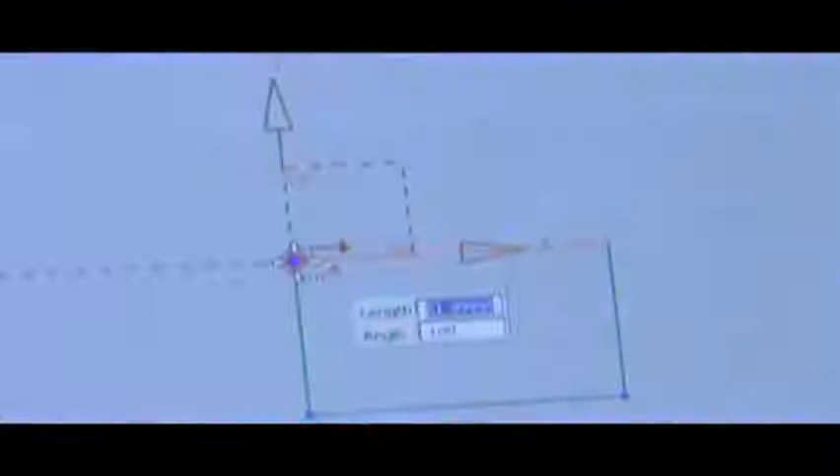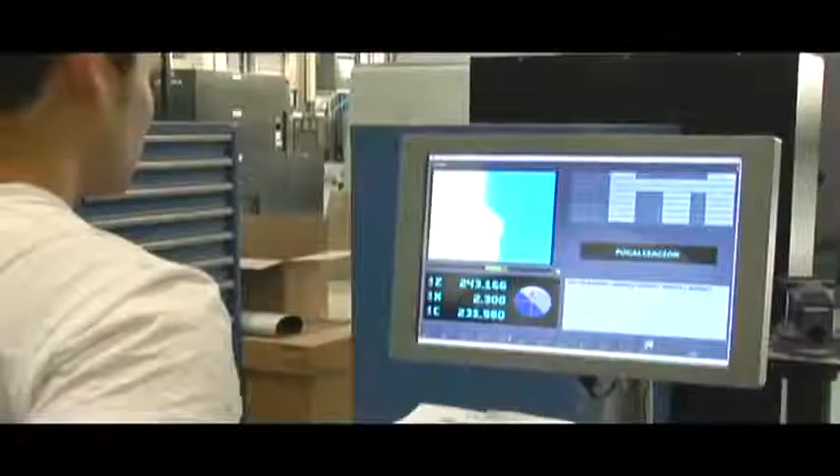More than 900 postgraduate programs are offered in the country related to technology and engineering. And most Mexican professionals speak English as a second language. This supply of specialized professionals exists in our country thanks to coordinated work between academic institutions and the aerospace industry.

Institutions that have devoted themselves to training engineers for more than 70 years. We considered it pertinent to create a collaborative network to address the topic of aerospace education. So, in 2007, some 12 educational institutions held a meeting. We shaped the creation of the Mexican Aerospace Education Council, in order to agree on what type of academic programs we had to create that were pertinent to the sector.

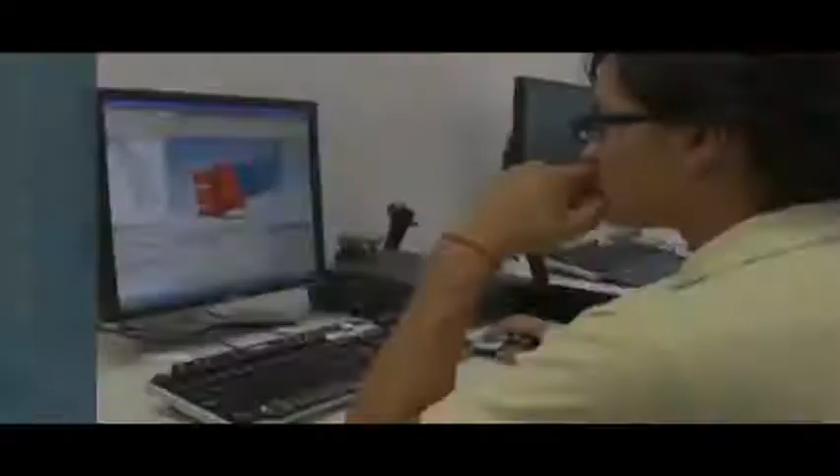With laboratories equipped at the highest level, today, these institutions created a network of educational collaboration, whose purpose is to train professionals specializing in the aerospace industry. Thanks to this effort, our country responds to this industry's needs. Mexico graduates technicians, engineers, and specialists capable of meeting the challenges demanded by the sector's companies.

The Center for the Development of the Aeronautical Industry is an effort we made as an institution, the Monterrey Technological Institute, Querétaro campus, to prepare ourselves for the new sector, a growing sector in the region. Basically, what we did was to take this center to prepare students and link them to the industry in this regard.

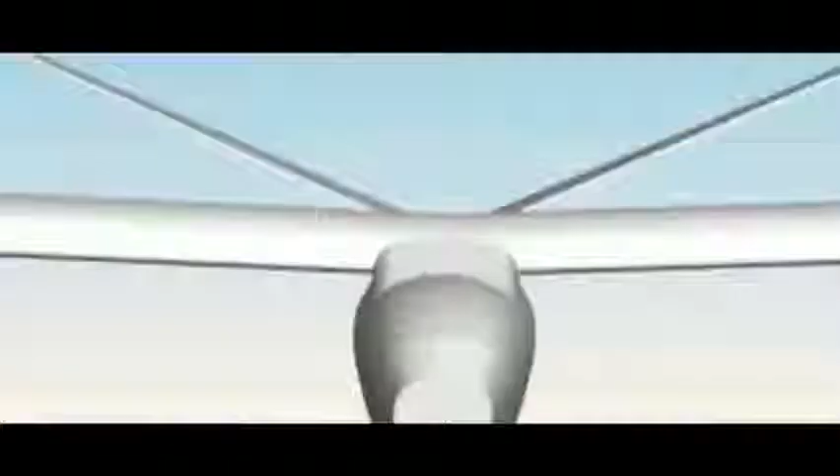We're giving the students specialization in which, in addition to their traditional training in engineering, they study subjects such as aeronautical materials, aeronautical design, fundamentals, machinery, etc. The Aeronautical Training and Specialization Center in Mexico has clear objectives: preparing professionals that satisfy the industry, linking them to the sector's companies, and fostering research, technological development, and innovation.

In the latter field, work is already underway on the construction of model airplane engines, aerodynamic materials and designs, and innovations for flight simulators. Basically, it was decided to build a flight simulator of a Boeing 737 airplane. And here, in front of you, we are showing the achievements so far.

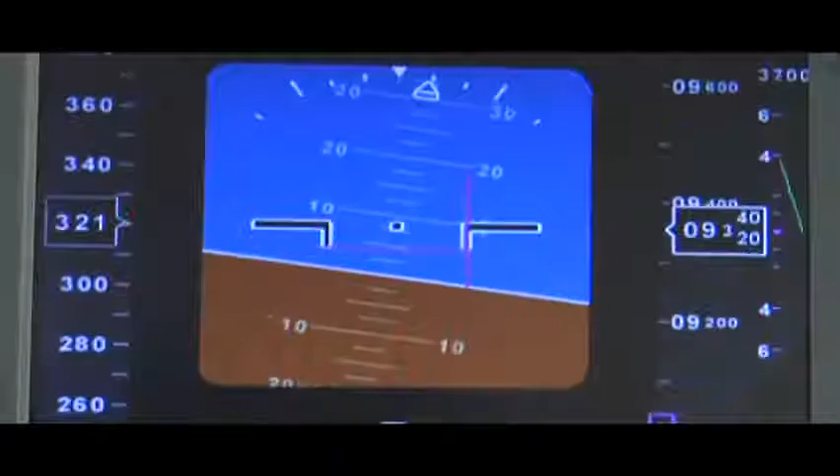We were approached by a company with a particular need, which manufactured designs. They needed someone who would simplify the amount of cables between a flight simulator and the control computer. So here, the contribution we made was to reduce the number with novel electronics technology.

Thankfully, the efforts of Mexican students and professionals are being appreciated in the world. Many people in the aeronautics industry, researchers, say that what we are doing has very important implications. By reducing the number of cables, the weight of an airplane is reduced. For example, less fuel is required. There are savings and benefits everywhere.

Here, at the National Polytechnic Institute in the aeronautical engineering career, we devote ourselves to the design and operation of the aeronautical industry. In our case, we're developing a new concept here in the country, which is what is known as a flying wing, or BWB, as they say in the milieu.

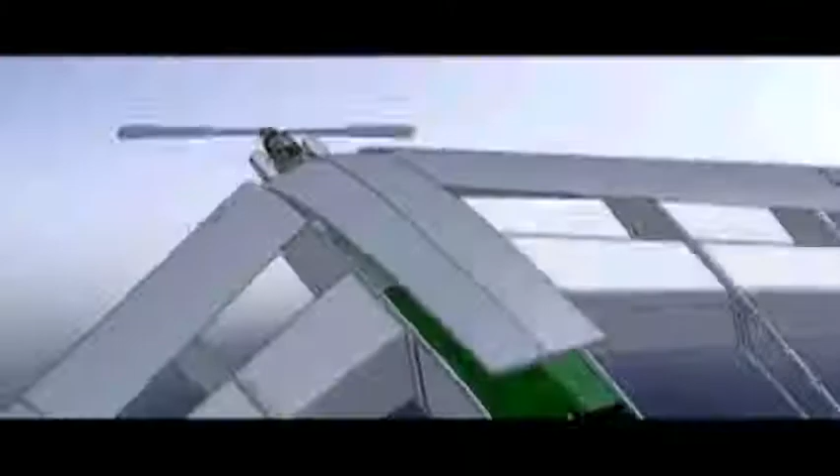Thus, it is evident that Mexico has developed a value chain made up of a synergy between high-performing human resources, research, development of suppliers, certifications, economic soundness, and government support. With highly trained national personnel, specialized programs in engineering and aeronautical technology, the industry-academy linkage, the furtherance of training provided from the public sector, and the efforts to develop and innovate technology, Mexico proves that it knows how to fly.